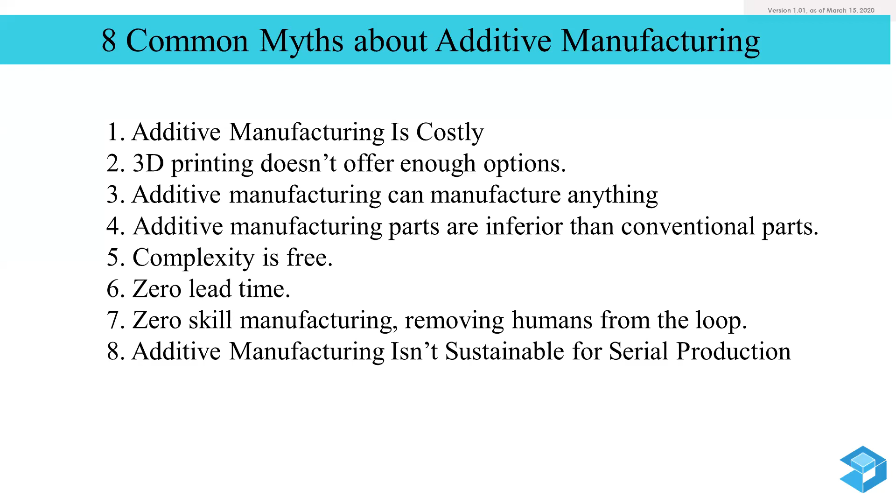We will also talk about the comparison between a conventionally produced component and an additively manufactured component, and then the complexity section: how additive manufacturing answers complexity-related questions of the design. We will talk about zero lead time, the misunderstanding that additive manufacturing can be done in zero time. Then we will discuss the skill factor, and also serial production with additive manufacturing as a technology for your product requirements. So Rahul, can you go?

So as I was mentioning in the previous slide, people think that additive manufacturing is costly. In my first presentation itself, I had shown you the similar graph of additive manufacturing having a unique value proposition. So the cost is nothing unless you create a wealth around it. The wealth around additive manufacturing is having a low volume and having unique designs, and those designs should be a bit impossible for other technologies, and your demand should be elastic enough to sustain.

So these are the criteria for how you can judge if the technology itself is costly for you or it is beneficial for you. There have been certain cases with our own operations where customers have been coming back to us because of their design, their small batch, or their elastic requirement. So it won't make any sense for them to go into other technology like die casting, injection molding, or any other production-related technology.

So additive manufacturing becomes a very good value proposition for quick turnaround, for small batches, for lean volumes kind of activity. So that's how it becomes a good proposition for your application itself.

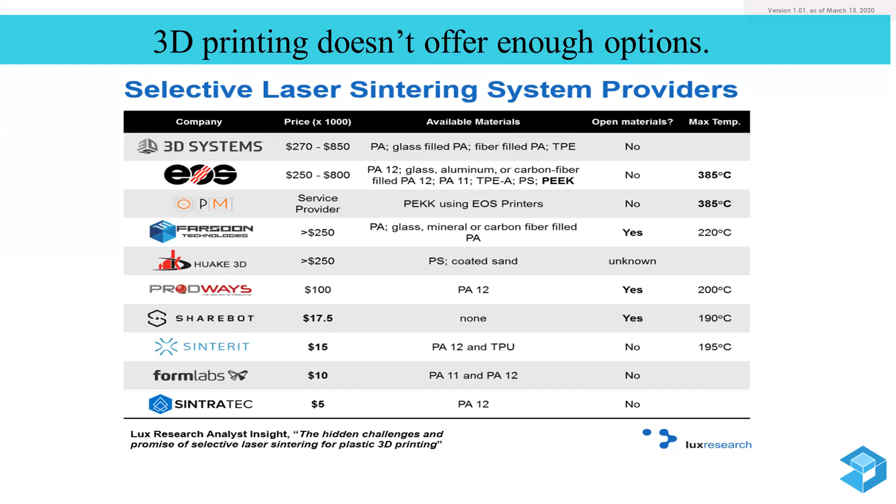Different sorts of materials, but not all sorts of materials. So this is one example. In the case of glass, yes, glass can be 3D printed, but the accuracy, precision and scale are not like the glass vials or bottles that you can produce. So setting a realistic expectation of what the technology can offer and what the limitations are is something we want to demystify. In metals and polymers, there is a lot of variety that you can print.

But when it comes to glass, we can mimic the glass using polycarbonate or any sort of acrylates or epoxy, which is clear. So we can mimic glass using 3D printers. But if you want to print glass, yes, it can be printed. However, there are limitations. The extruder that you can use for glass printing has to be at least 10 in thickness, so you cannot print very intricate shapes and tiny feature details.

The reason behind it is glass rheology. So the material properties come into the picture in these scenarios. Glass melts around 1800 degrees centigrade, so that in itself is quite a challenge. What sort of nozzle design has to go along with that? What is the flowability at a specific temperature? All these things need to be considered.

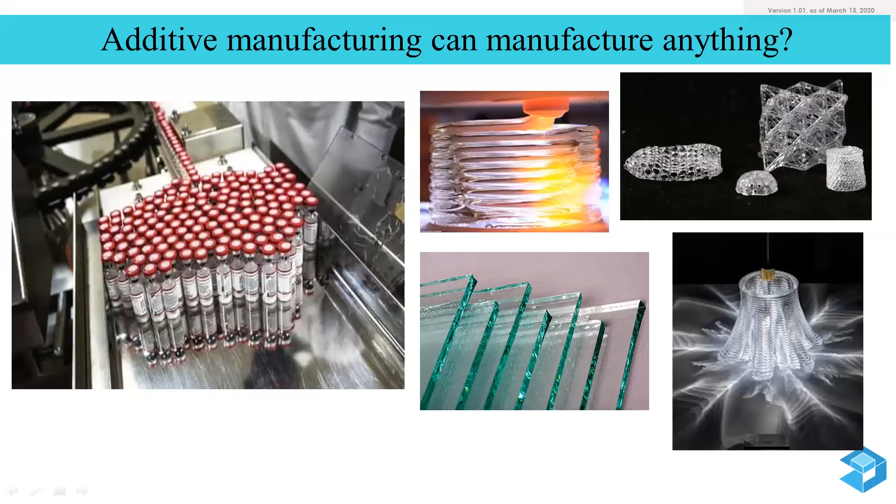So what people were generally asking in the previous two sessions also is that additive manufactured components can have lower properties compared to conventional components. But there have been certain applications where people have realized additive manufacturing is an answer for their component, and now people have started designing for additive manufacturing. So it has changed the complete structure of designing a component for manufacturing itself.

So it is a new aircraft from Boeing. So if properties was the question, additive manufacturing answers that question really well. What we generally tell our customers is that the properties of an additive manufactured component will be somewhere between investment casting and forging technology. So it will be lower than forging technology, but it will be higher than investment casting.

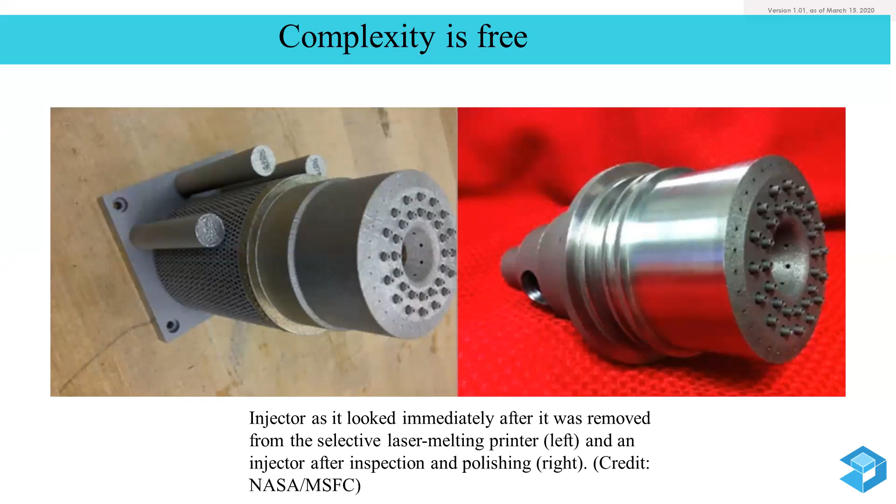So okay. Yes. So next, you can add a certain comment on it, and then I will move. So the most important part of additive manufacturing or any other technology is how well you do your project planning itself. So whenever you take a component to be manufactured, what you have to take care of is how you want it at the very end. So that kind of planning is very much required in additive manufacturing. So complexity becomes a challenge for post processing. So you have to orient the component, you have to design the component for utilizing all the activities which are related to finishing the component in its desired form itself.

So Rahul. Yeah. So next one is about lead time. Ankit, share your experience. So what people say about the technology itself is that the lead time will be very low. So people say it tends towards zero. Yes, everything tends towards zero, but it is not magic. So you have to do a lot of project planning. You have to invest time with the machine itself. You have to invest time in the design itself. So that amount of time is also the lead time incurred in the process. Yes, it is faster than any other technology, but it also depends on your production rate.

So if compared with injection molding, in injection molding the time to produce the tool is higher compared to an additively manufactured component. But in injection molding, after the tool is made, the subsequent number of shots are easier and faster to produce than additive manufacturing. But you can have those initial batches, and you can answer your elastic requirements, elastic demand of your component itself. So that's where the technology becomes very good on lead time. So it will not be zero, but it will be very less as compared to the conventional technology itself.

I will add one comment. So people paint a picture that the printing is instantaneous and you just have to upload certain design data, and at a click of a button you get the necessary outcome. And that's a wrong conception. And also on top of that, the lead time experience in comparison with additive manufacturing and conventional that Ankit was speaking about. So imagine you made a mold for making zebras. So that is a fixed automation. As a toy for kids, you made a zebra tool design, and you can only get zebras out of it. But it can be at a faster rate. You can get thousands of quantity, but you cannot get any other toy.

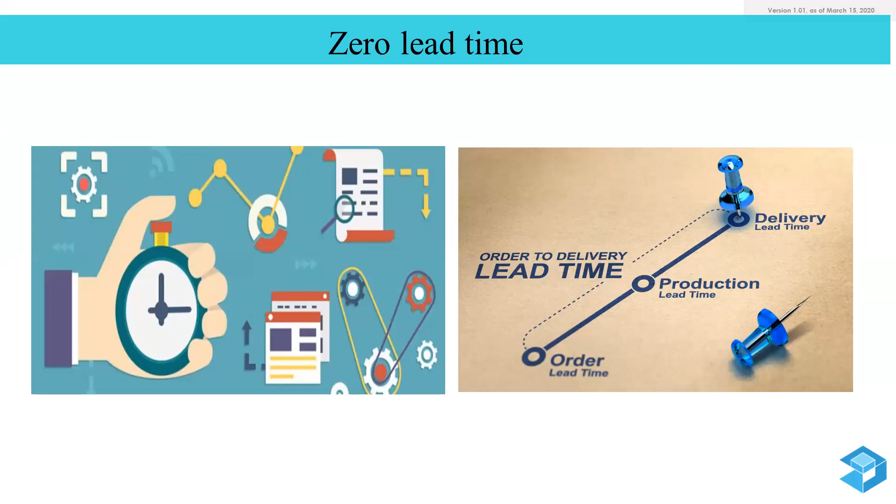So skill set requirement and the learning curve is quite steep in additive manufacturing. It has been a misconception with everyone that it is a very easy to use technology. Yes, it is easy when your designs are good and your machine codes are running very well. But to have certain complex programs, in a case like Objectify, where we tackle almost 30 odd customers daily, and these 30 odd customers have, let's say, 5 different designs, it comes out to be 150 odd parts to be produced in a single day.

So that kind of project planning is very much required. That kind of data preparation is very much required. And that kind of scheduling and forecasting of our capacity is very well required. So that's where the skill of your manufacturing understanding comes in, and that's how additive manufacturing is a technology where you have to have a very good amount of learning on the manufacturing process and the design aspect itself.

Rahul? Yeah. So that previous slide was about fixed versus flexible automation again. Whenever fixed automation is going on, you can design it once and it can be producing the same article, but there is no innovation. Innovation is stagnant. But this technology offers you continuously evolving designs, continuously challenging and pushing the envelope. So yeah, next topic, Ankit, take it.

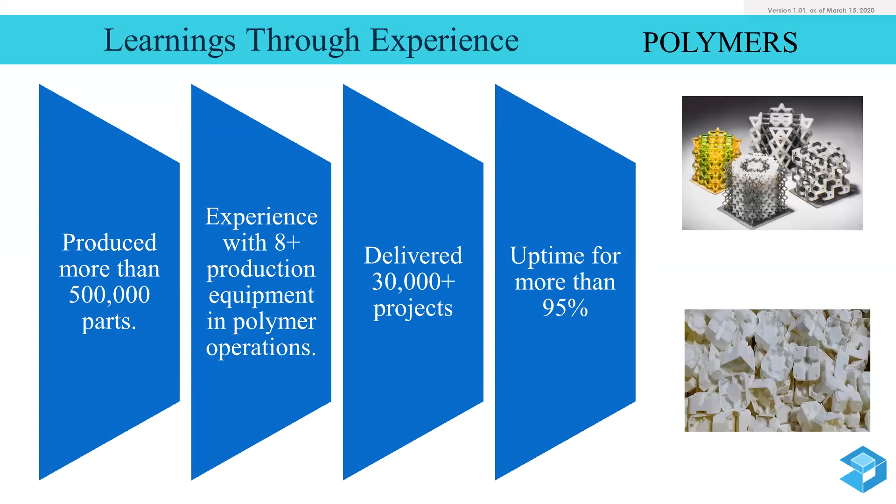We also wanted to talk to you about metal. Currently, at least on the metal side, we are the biggest additive manufacturing setup in India and South Asia. We have a good experience of more than 25,000 hours of printing in metal, and we have executed more than 2,000 unique metal projects. It might consist of several designs in one project itself also.

Our metal operations began in 2016. In 4 years, we have melted more than 8 tons of AlSi10Mg, 5 tons of maraging steel and SS316L, and 3 tons of titanium Ti6Al4V. So that is the experience on material level, and that is our experience on executing projects for our customers.

From there, we have learned a lot, and we have gone through a lot of failures and a lot of misconceptions at our end, which got cleared during the process itself. These learnings we wanted to impart with you in today's presentation. I just wanted to give you a background of Objectify's experience, which is why I wanted to discuss all the statistics, so that you will be confident that we have some backing numbers with us.

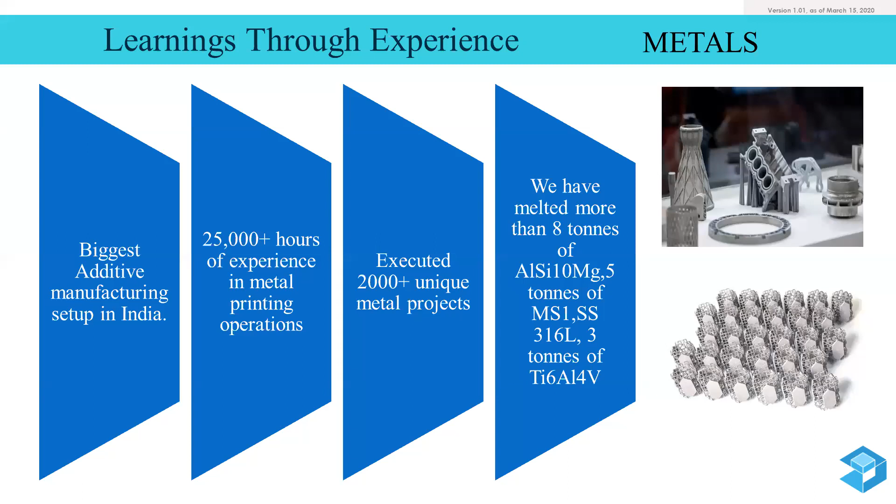So the learning process for us is similar to what you do. It is learn, unlearn, then relearn, and then reinforce the technology itself. Learning comes from the experience, unlearning is a reflexive action, or the observation of what we do, and then again we relearn, which is called thinking. Whatever we unlearn, we think about it and then reinforce those learnings in our attempt to complete the process chain itself.

We also follow a PDCA kind of cycle, which is a known planning cycle. We again and again learn in different projects, because we are not exactly making a product. We are trying to service our customers. Every customer has a unique problem statement with their unique designs. With every design we learn a lot, and that learning we wanted to impart with you. So with this similar cycle, I want you today to learn, unlearn, relearn, and reinforce the thought process itself. Right?

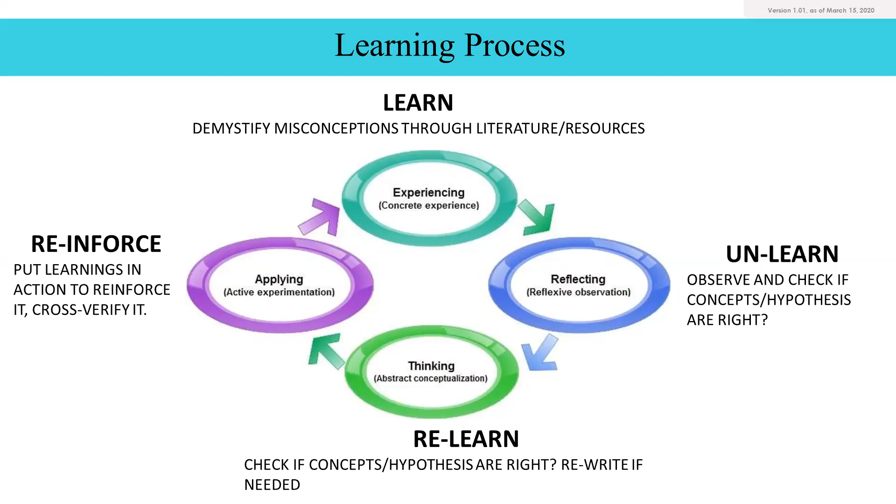We will be talking about the SLS process and the defects around the SLS process itself. As I told you, we also faced a lot of difficulties in understanding what kind of technology is required for what level of part quality. So I just wanted to discuss the SLS front.

There are 4 kinds of defects you can understand from the technology itself. One is geometric and dimensional. The second one is surface quality, which is related to the finishing of the product. The third one is the microstructure, and the fourth one, the most important one for any material, is the mechanical properties. In the geometric and dimensional defect, dimensional inaccuracy is the basic problem. So we reiterate several times on the process itself to have the best results possible.

The surface quality in SLS, as an example: orientation plays a very big role in the surface finish, and the layer thickness. So we take care accordingly. It should also not affect the monetary factors, which is the profitability and producing as many parts as possible in one single go itself.

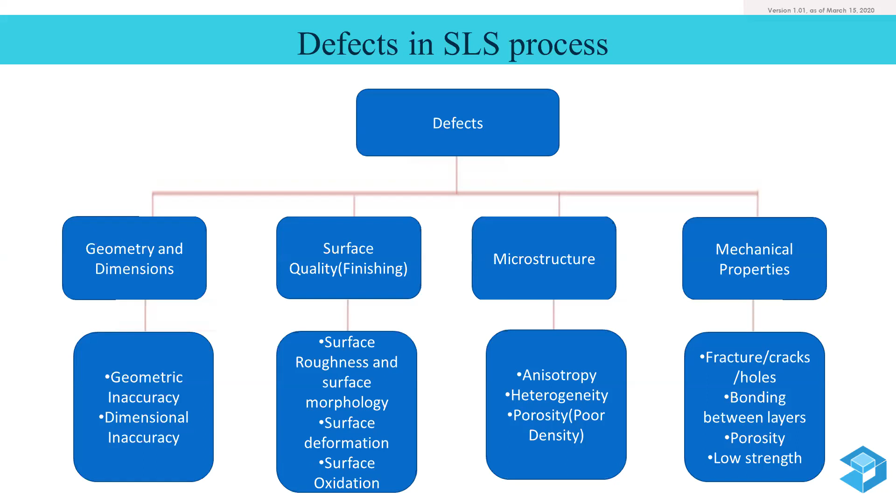Then comes the microstructure. So the microstructure of the component is very important, as you are melting and solidifying the layers. So microstructure plays a very important role, and the mechanical properties are important for your functionalities. So those are some of the defects we answer every day with our customer-related problems.

So these are some of the things where we talk about the warpages. So warpage is also one of the basic criteria. It depends on the material getting curled in itself, and creating self-buckling kind of an attribute. So here you can see what kind of examples there are for warpages in SLS technology. So you have to choose the right parameters for the right level of requirement of your product itself.

So Rahul? Yeah, so I can add some more on this page. So you can see there are 4 variants: A, B, C, D. In case of B and C, you can see because of the warpages how the geometry is deforming, and it is not giving perfectly orthogonal surfaces. In case of B, it looks like it's blown out, and in C it is shrunken, and in case of D, it has a totally warped geometry in a transverse plane.

So something of that sort affects your assembly as well as the overall aesthetics, how the product looks in terms of finish and feel. So that is something we need to tackle. These are very common challenges engineers solve. We are always living in a dilemma that we want to achieve faster delivery, but with better accuracy and a lower cost. So that's one of the dilemmas.

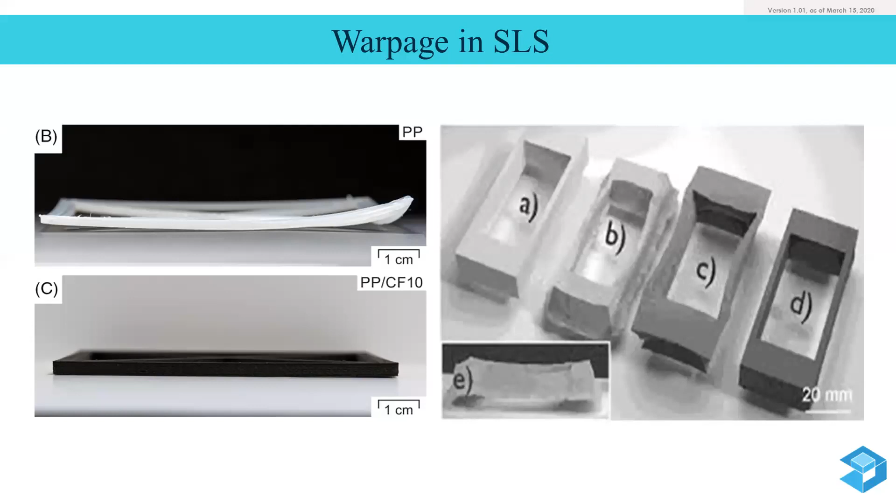Yes. So in additive manufacturing as a prototyping technology, these are a few of the things you have to take care of while producing a good component. So you can check these kinds of results after some testing samples, and you can check the temperature at which you are operating and what melting power you're using on your laser. So these are a few things you can take care of. Rahul, can you go next?

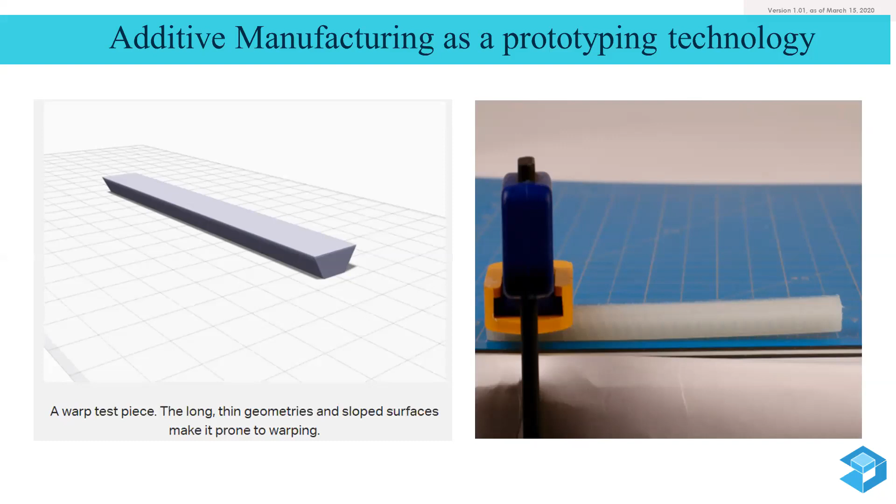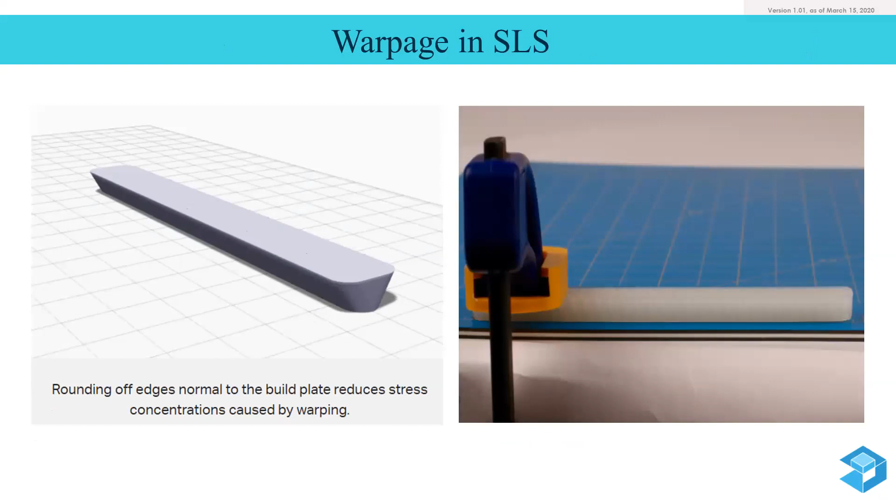Yeah, so over here we are changing this geometric shape in order to get better accuracy in terms of that very high aspect ratio, thin structure geometry. So we are changing the shape, and with those sorts of experiments, we can reduce the warpages. And these sorts of design interventions we constantly do. So the next topic is Ankit.

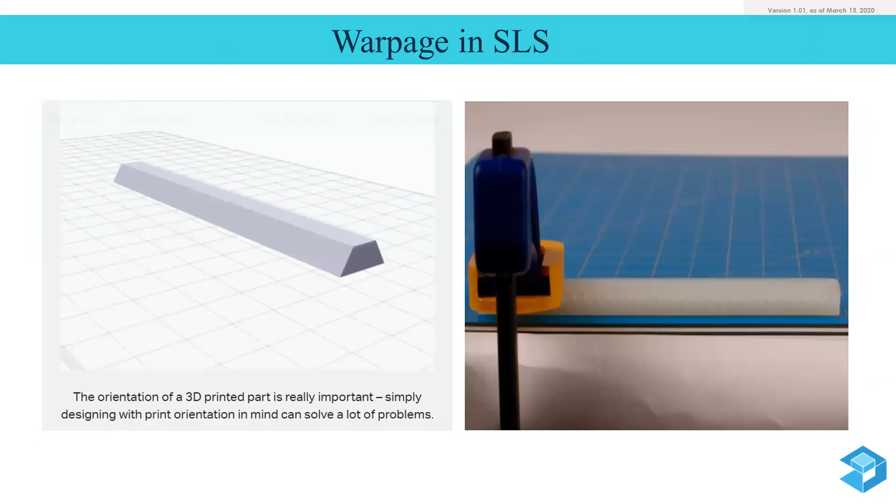So we have to decide what kind of compromise we want to make on the feature or the surface finish itself. So these are some things you need to take care of during the process itself. Rahul, can you go next? Yeah.

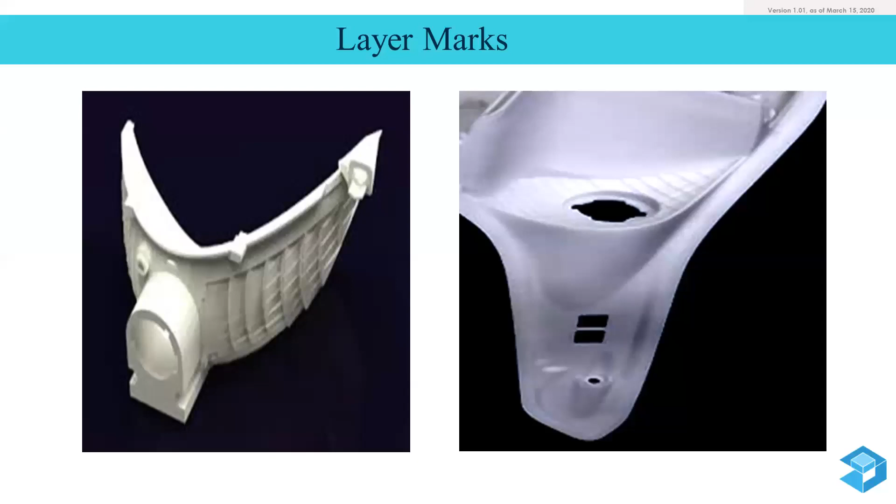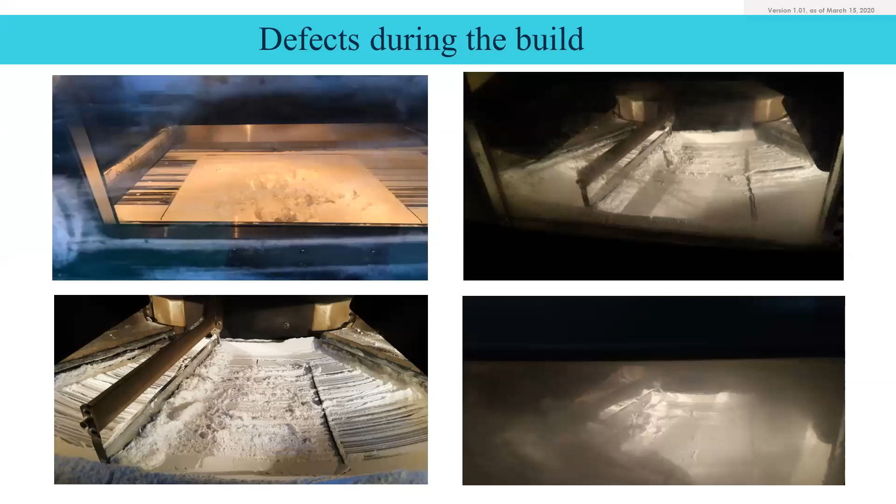But due to this, there is a lot of monetary loss. So we have to understand that these are some of the factors we have to take care of during the process itself. Rahul, can you go next again? So defects on the hole sizes is also one thing we should take care of, and we do design of experiments for this.

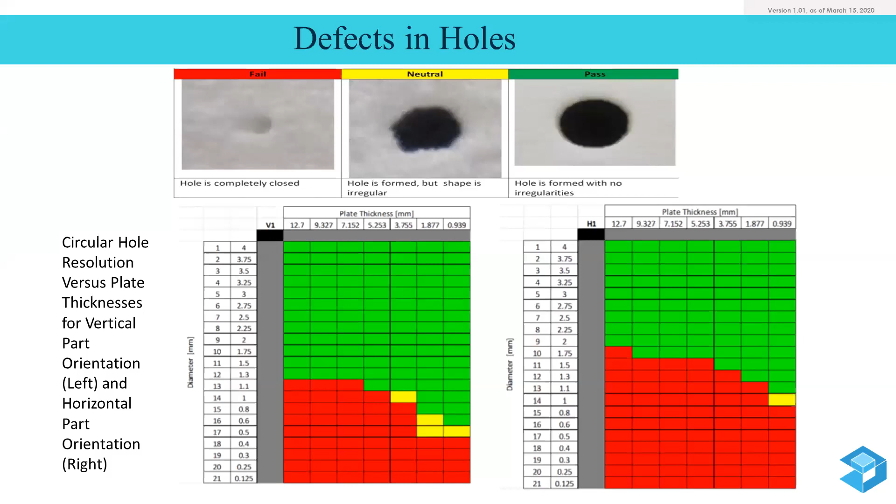As you can see on the screen itself, there are certain holes which require a certain level of resolution. So here is one small DOE we generally do to understand what kind of laser power is required, what is needed for the surface finish requirement, and how we should go ahead in answering these kinds of problems.

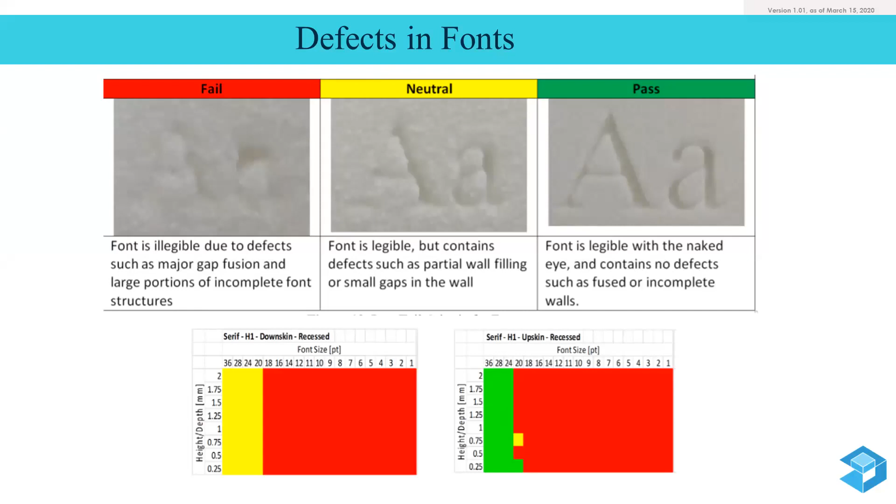So on the font, let's say you want to type your name on the component, you have to take care of these related problems. You have to keep checking the thickness and the indentation you're working on. So again, you have to do certain DOEs to gain that kind of experience and tell your customer that these are the desired inputs related to the design itself, and you have to tackle them during the processing of the build itself. Right?

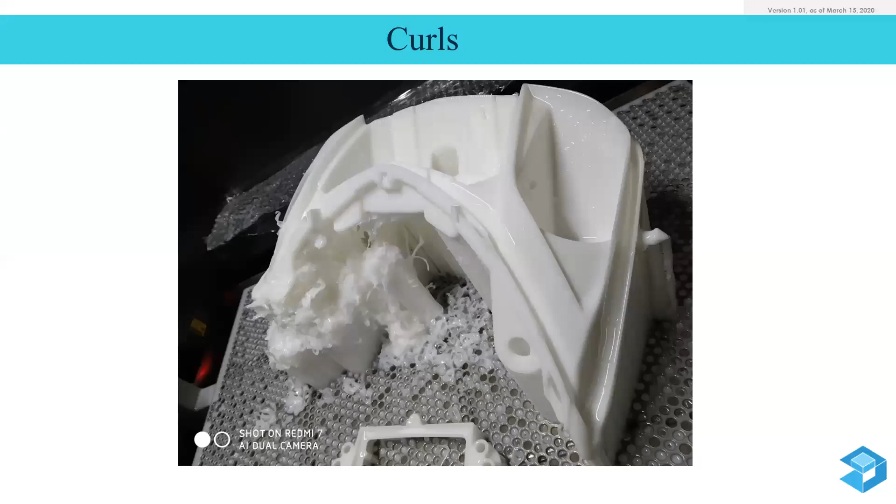So again, support is a very big challenge in stereolithography. You have to orient the component as desired, and remove as much extra support as possible, because it is a sunk cost to your product. But doing that, you should not cut material so much that the component fails during the process. So you have to design and orient accordingly, so that you require less support but enough support to actually make the component.

Rahul? Yeah. Next poll. Yes.

So we are designing these polls to engage you and understand where you stand in terms of utilization of technology, what information we have shared so far, and how our next engagement should be, so that we prepare our programs for better reception with the audience, and there is an action plan to follow. It's not something you consume as information and forget; that's the failure we would consider. The learning has to be reinforced when you put it in action. That's the plan, do, check, act model we mentioned. If act is absent, what's the point of plan, do, and check? That's why we are very action oriented, and in the learnings we shared so far, you can see there have been failures. Failure exists where there are actions.

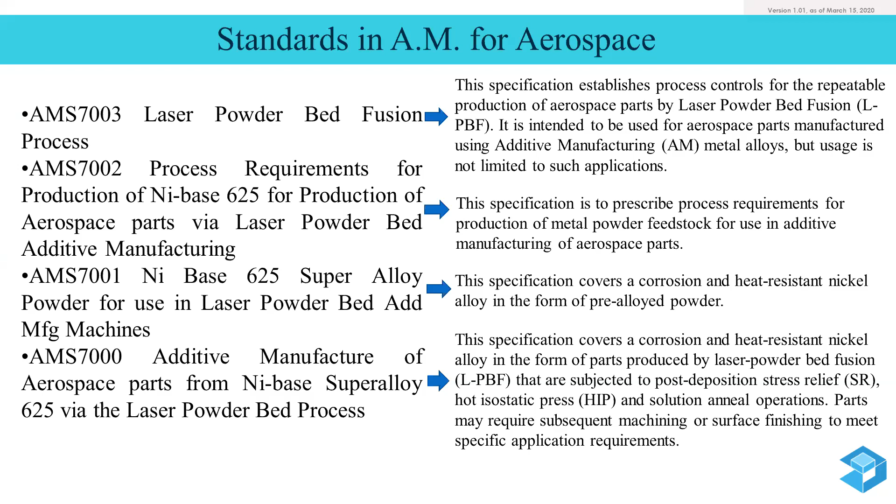Only focusing on the printing process is foolish, I think, because what you are going to print, you need to be smart about that as well. So in order to handle the complexity, it's not the process that you usually follow in case of injection molding or blow molding or casting, die casting, where you just qualify the tool and process just once, and it is repetitively manufacturing the similar sort of component.

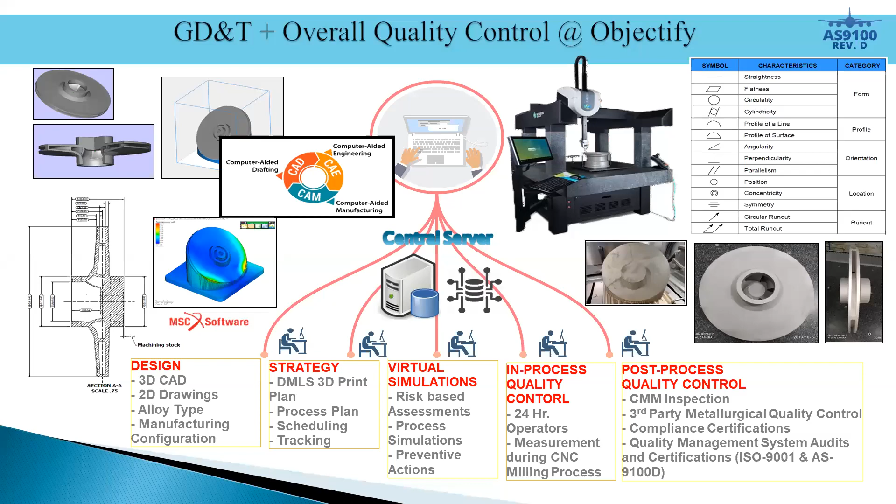So first beginning with the process management, but that's not the end of it. We have to see, in process, how we can control the quality and get the best outcome. So in terms of machine maintenance as well, which becomes very crucial. So we continuously keep on doing this type of qualification at certain frequency, in a sense calibrating the machine performance. So we build this type of test builds as a design of experiment and do the calibration, find out the beam offset and do the correction.

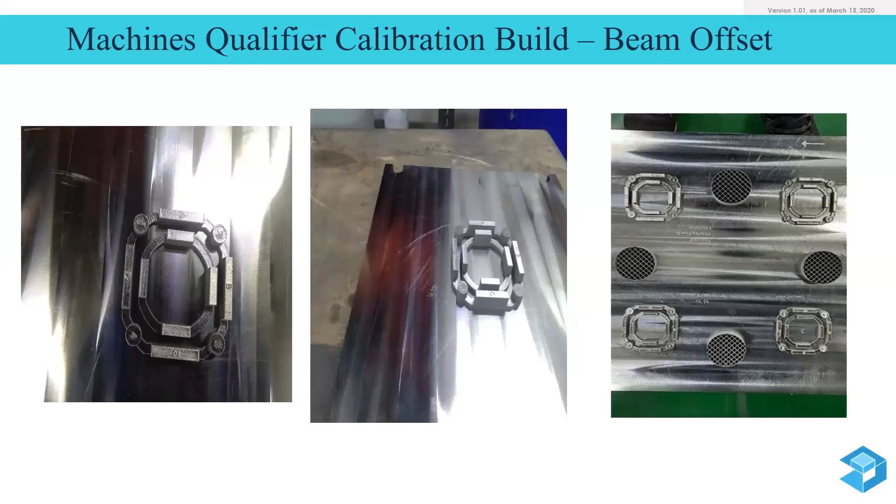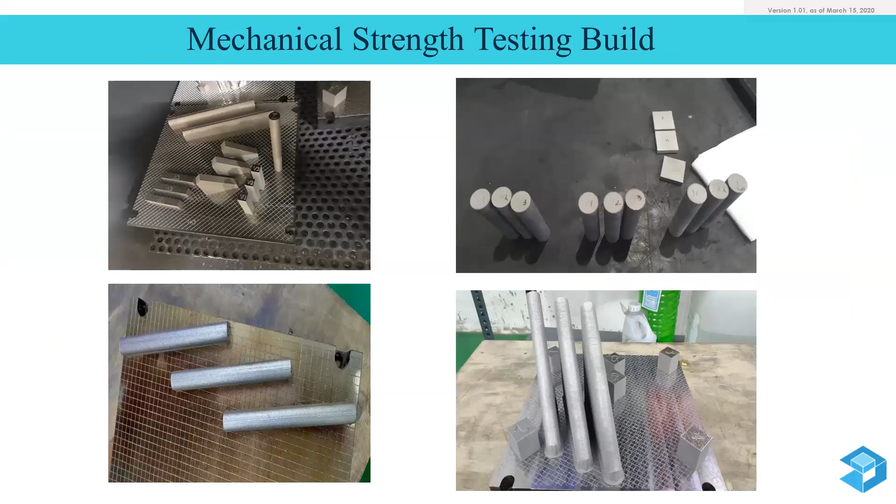And Ankit, in the first webinar, was sharing the example of ISRO, how they are level-headed in terms of expectations and very thorough in terms of defining the quality parameters and all. So in terms of that, robust input gives robust quality and output. Garbage in, garbage out is something CAE engineers use every day, I think. So this is an example we are showing.

So we print certain objects which we process in order to find out how much is the residual stress, and because of that the bending or warpage that is coming into objects, and we measure that using CMM and that data gets transferred into models. We feed those models. Once those models are learned enough, then they can predict much better, and we can believe those results almost blindly.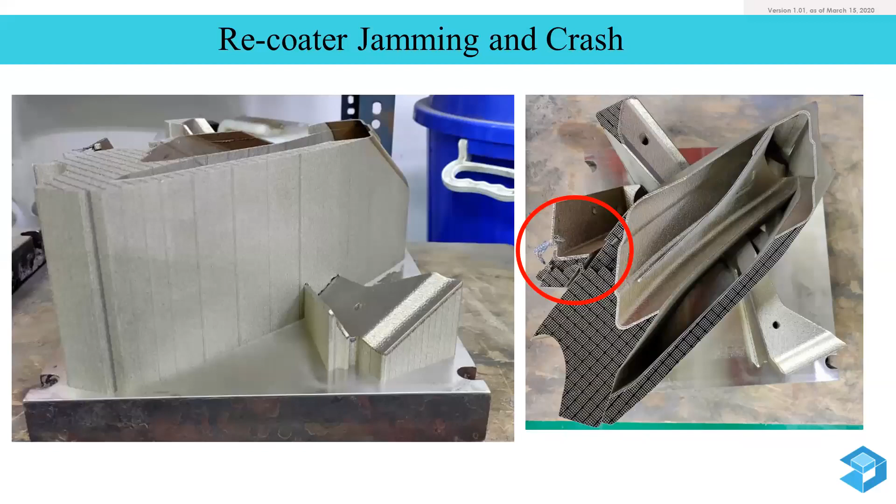So over here you can see printing a thin shell-like structure, almost like a sheet metal component. There was a failure because the coater had jammed, and because of the thermal deviation in the geometry. Similarly, we experiment. So we wanted to print around 3 sectors in order to make a complete stator of a compressor. That is made in titanium.

So we wanted to understand the best strategy to print the entire sector of 120 degrees, because of the build envelope we can only print 120 degrees, and then it has to be welded and joined to make the complete 360-degree structure. But if we fail on that sort of a 5 kg component, which is 120 degrees in arc, that will be a very severe failure. So we wanted to fail early, fail small, fail cheap.

So over here you can see, on only a 10-degree sector we strategized different support structure strategies, and one of them failed, another one succeeded. So that's the way we proactively plan how far we can push the technology, which variations we can put in practice, and learn from it.

So another example, again a sheet metal type of component. When the coater jams and hits, if the geometry is too thin, then it can have a certain deviation, and there will be a subsequent offset because the layer will not be depositing at the correct location. So that is one kind of failure we learned. If we are printing very thin sheet kind of geometry, this is something we have to watch out for, and we have to have a certain reinforcement plan.

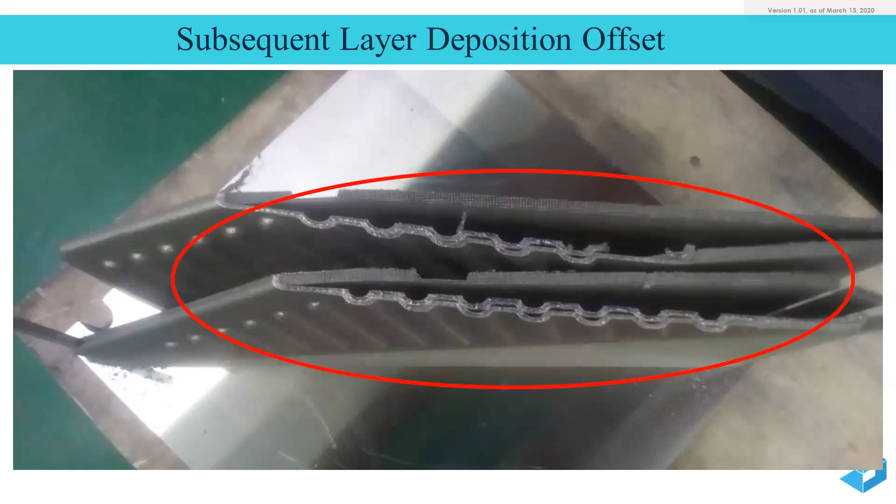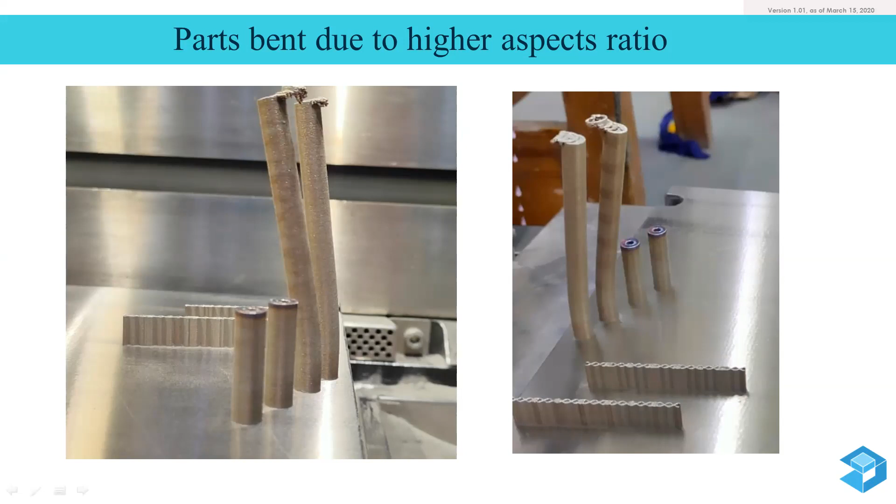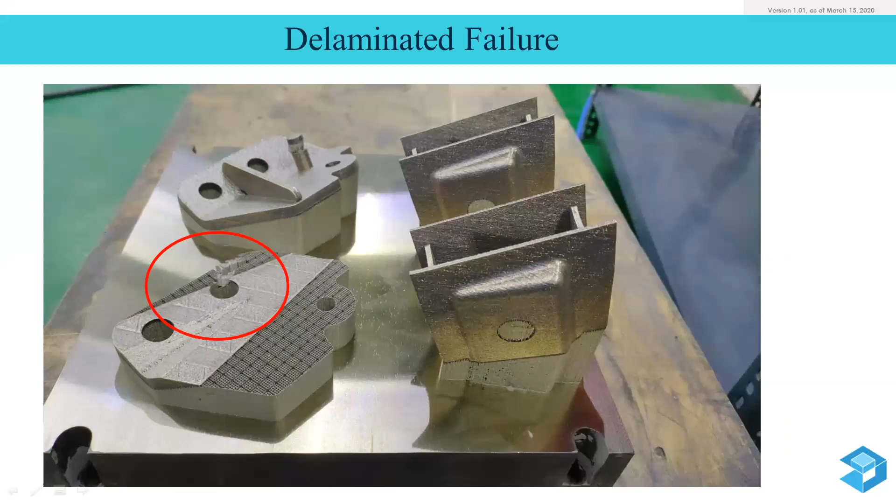So over here, 3 components were printed successfully. One of them got that sort of failure. So you can see these types of failures are common. Even though we are pre-planning, we need to do simulations, we need to do qualifications, but still there are certain surprises. So we learn every day and accommodate, and the way that we do it, I will show it to you. So I will first go through all the types of defects and failures that likely arise.

So this is a crack initiation, you can see. Since bigger, chunkier geometry, once it receives laser exposure, has a higher tendency because of the thermal conductivity, the heat capacity inside that big, thick cross-section geometry. It can retain heat longer, and the thinner structure can get cooler faster. So you know that phenomenon. The surface area is essential.

That's why fins are added on cylinder heads of engines, or fins are added on top of our gadgets like PC chips, the semiconductor microprocessor type of chips. They also get heat sinks, right? So those are with increased surface area. So in the case of support structure, that is very mesh-like geometry. It has more surface area. It dissipates heat much faster.

But the thicker, bulkier sections don't release the heat very rapidly, and then that differential in terms of temperature causes delamination and crack initiation. So that is very common in metal 3D printing, and how to define a robust heat dissipation strategy with the support structure becomes a key challenge as well.

So all this type of learning, as I described, how we record it. So we need to have certain failure records, otherwise it gets missed and it's a lost opportunity for learning. We can blindly replan, and it will be just a fluke that one day it printed successfully, another day it did not. It is a matter of chance, and it is almost like gambling, right? So with that sort of approach, the failure rate can be tremendous, and you will go bankrupt very soon. So we don't play gambling, of course. We are engineers. We need to make wise choices, weigh the options very wisely and solve the dilemmas.

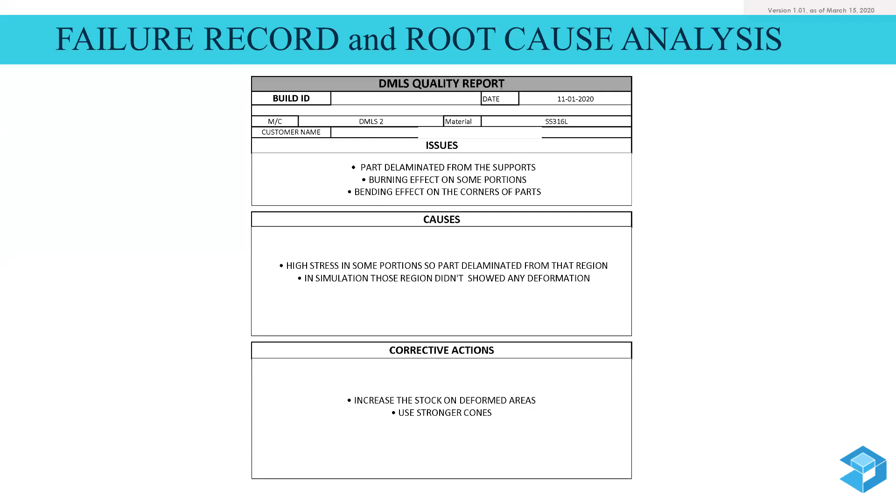So over here, you can see the issues are recorded, the failure modes are recorded, then what can be the cause for that failure mode is recorded, and how we can do the corrective action is proposed. And these types of approaches bring in interventions at the early design phases or process planning phases, where we can implement certain corrective actions or preventive actions. So learning can be in-house and outside as well. So we are constantly looking at how certain things are getting manufactured and what we can learn from it.

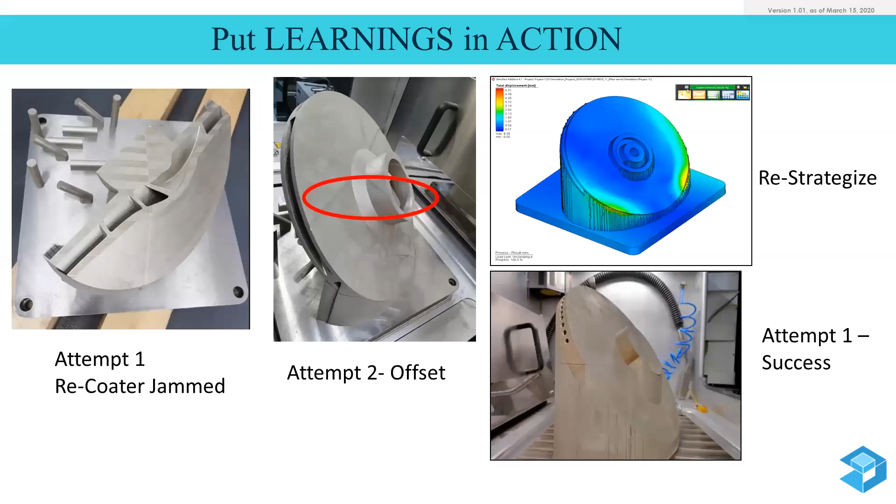So the two images on the left side, you see an attempt by one of the fabricators, and they were facing recoater jamming issues and offset issues. Even though the recoater jamming collapsed the first attempt, they went ahead with the same plan, and it again jammed. But after the jam, the subsequent layer deposition was offset. So that was the second attempt, again failed. So we re-strategized uniquely. We employed our computer power and failed virtually, and we were successful in the first attempt. So that's the beauty of learning from failure and how you can gain advantage using the power of digital skills and thorough understanding of the process.

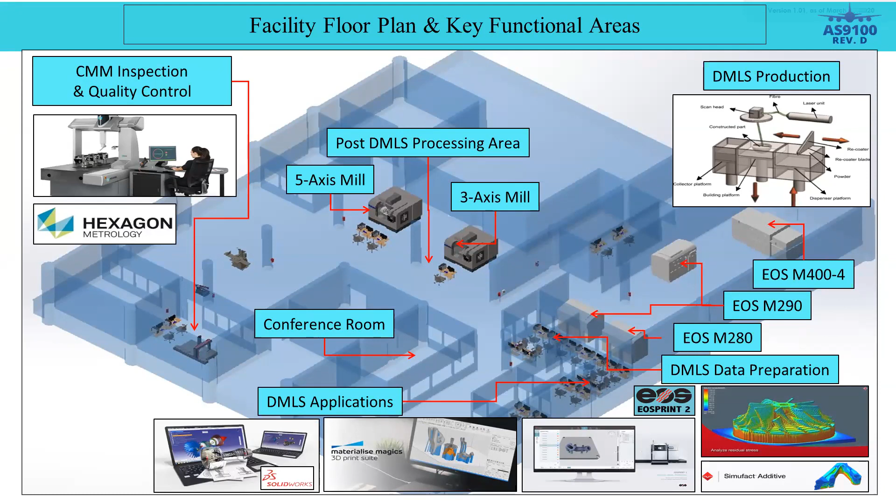So we do the layout planning like this. So you can see where our areas are, where value-added work is going on. Supportive areas as well. So people need to be safe, secured, certain safe practices, as well as the power outages are common as well. So UPS and utilities, all that sort of.

And once these kind of infrastructure and support is in place, then people are motivated to deliver better quality products, as well as they will intervene and be motivated to resolve certain issues and problems. So that's the end of our presentation. We will go ahead for discussion.

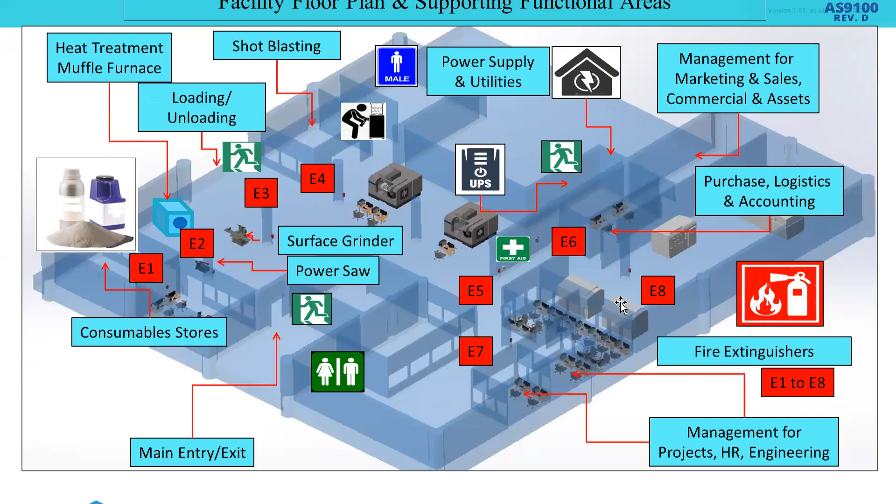So meanwhile, I will show our plant layout in much more detailed manner. So how our plant layout looks like, and I think most of you will be curious that we want to see the plant facility, but we are locked down at home. So we came up with the idea that why don't we give you a virtual plant tour.

So Ankit, you can keep engaged. I will open up. Yes, meanwhile. No, you can just show them around. Yeah. And I'll be answering their questions also. So you open. Okay. So can you see my screen? Hello, Ankit. Can you see?

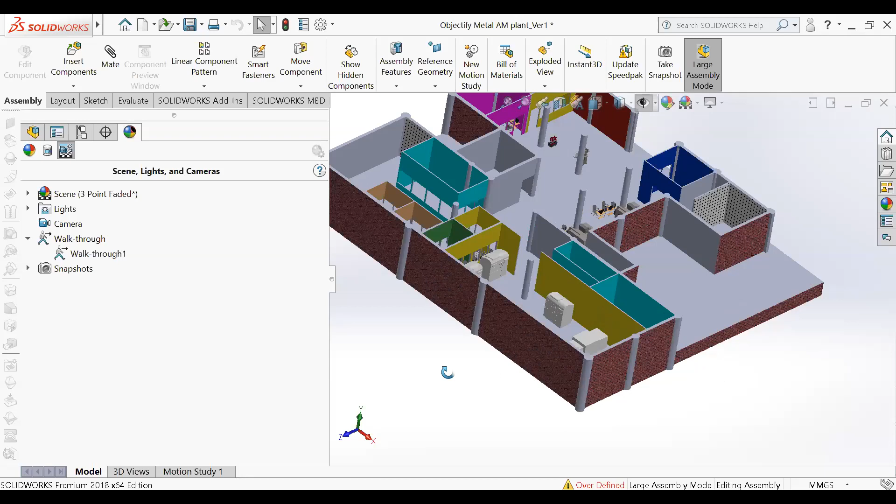Yes. So as I shared with the image over here, I'm operating using a 3D model and showing you the area. So we have a production area for 3D printing in this yellow zone, and the raw powder is over here. Then all the design planning is in this green area, and production planning, process planning is in this yellow area. Post processing happens in this open floor, shop floor, where we have CNC machines, and the loading unloading bay is over here. So that's how our layout looks like.

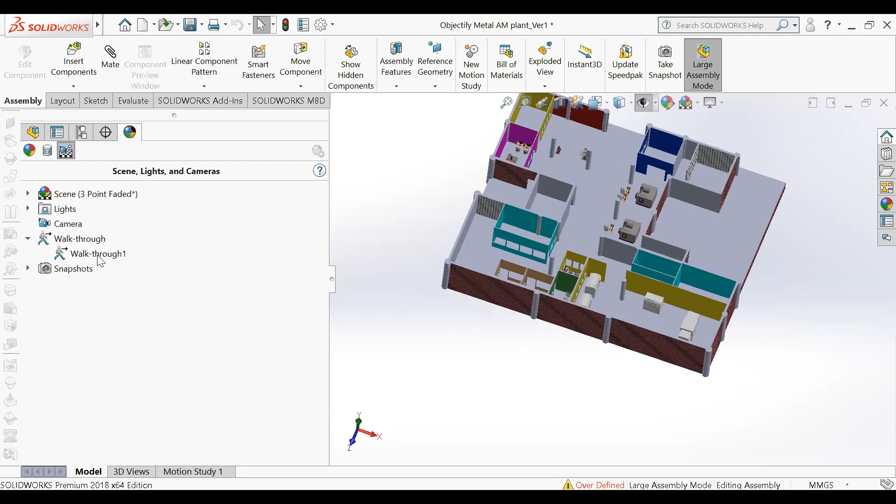So let's walk through the layout. So I will show you a walkthrough. Okay, so we are at the entrance. Just a moment, I will go to the entrance. Yeah, so we are at the entrance. So first, as soon as you enter our facility, you'll see the quality room.

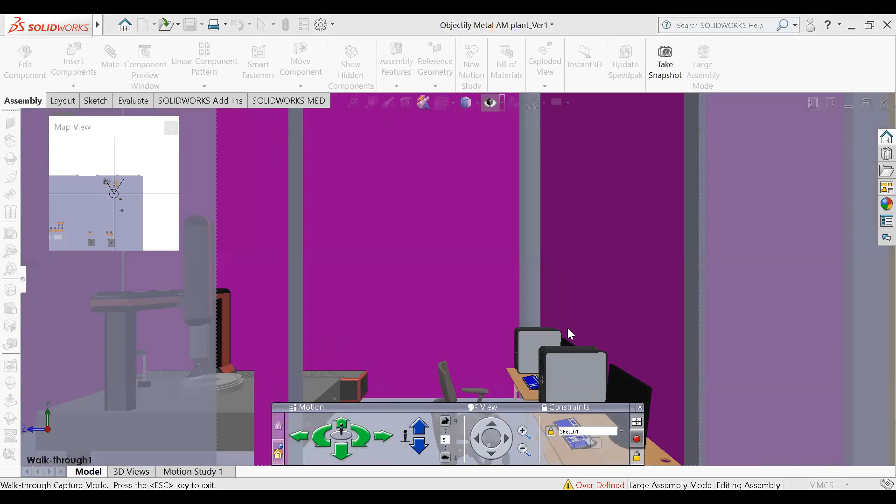So in the quality room, we have records that I was mentioning, the learning and experiences, as well as outgoing parts that are to be dispatched. We do the inspections over here using a CMM machine. So we have a couple of engineers' workstations and a CMM machine, and our material library and overall quality framework, all the records we manage in this room.

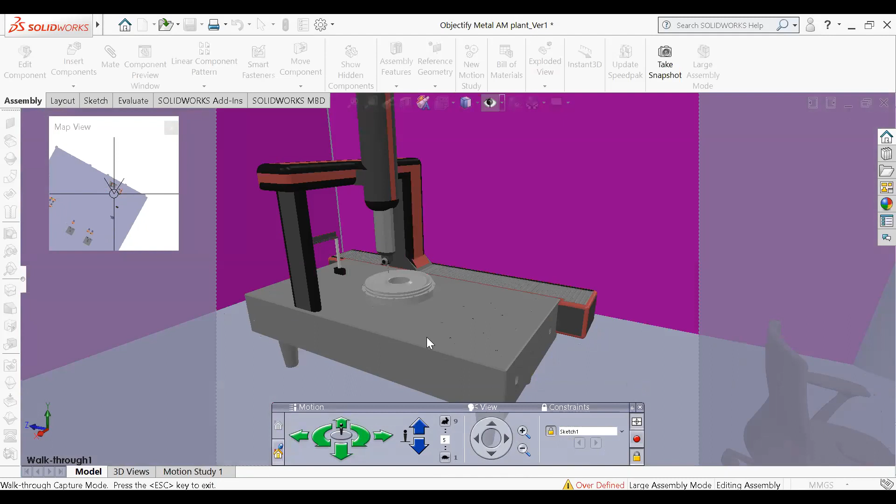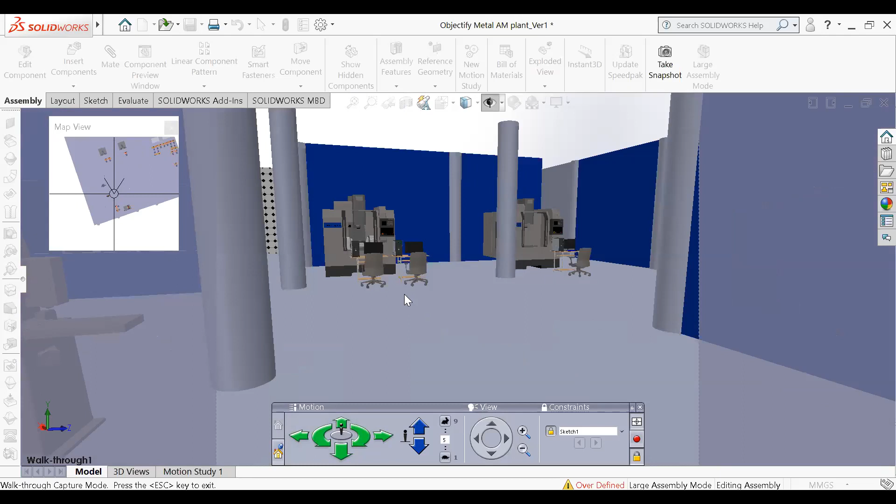So I'm showing the process chain in a reverse fashion. So before coming to the quality inspection, the post processing has happened on the component. So the post processing happens on the shop floor where last finishing touches like CNC milling and surface grinding, or if certain parts need to be detached using the power saw, all that happens over here. So let's walk towards the CNC machining capability.

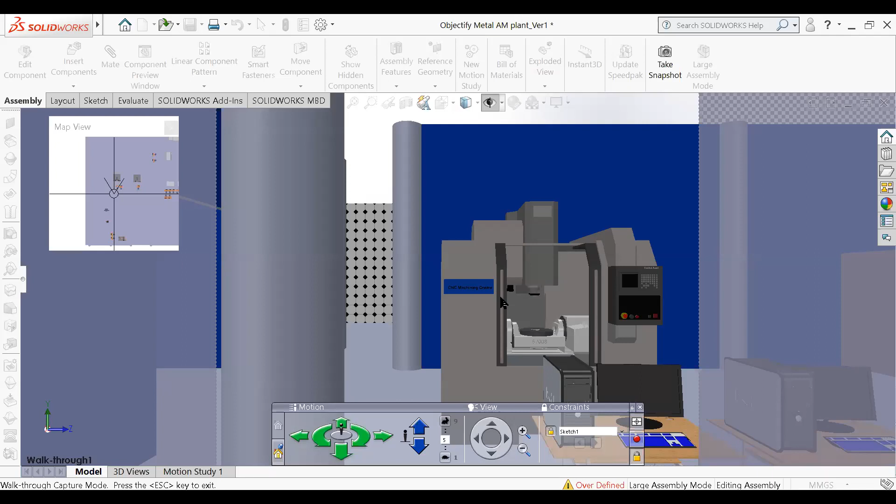So we have two CNC machines in our metal facility in Noida. So this plant is the only Noida metal facility, which is the recent one. So we moved into this facility last year in March, and it's almost a year now that we are operating in this facility. So we have two CNC machines in Noida, one CNC machine in polymer operation. So the polymer is not that advanced machine, but in case of metal, we need to handle certain complexity.

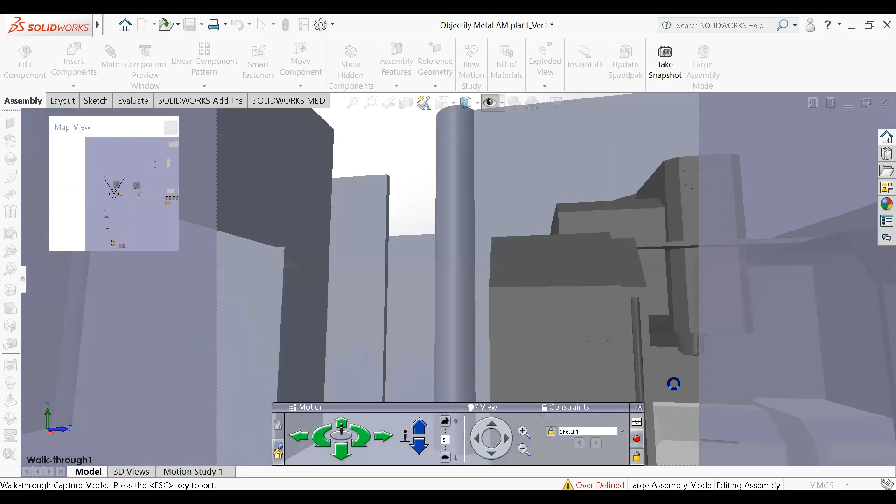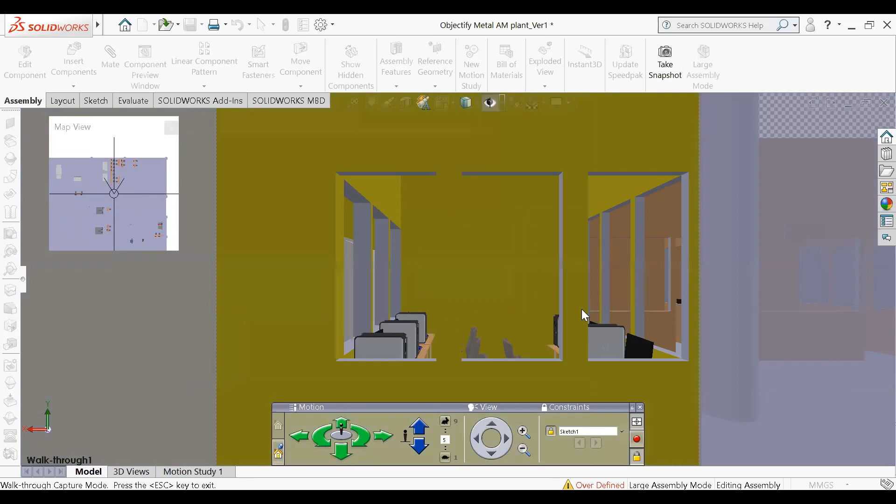And over here, you can see the best and latest one is a 5-axis machine with these rotary tables by Mazak. And we have another 3-axis CNC milling center. So both these machines do the post processing. So let's walk over to the 3D printing production room. So I'm walking towards the 3D printing production room.

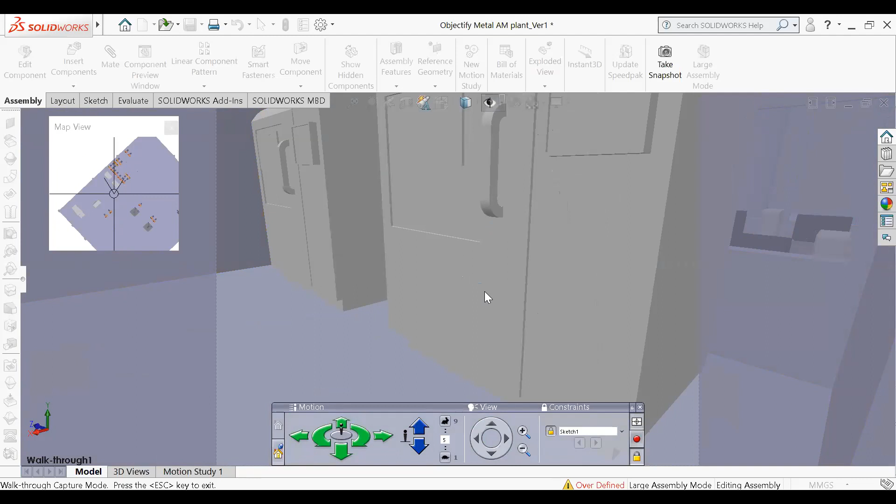So in the 3D printing production room, we have two machines on this right, which are by EOS. So DMLS technology we had been speaking about, that's the powder bed fusion. So these two machines are M290. M290 machines have a bed size of 250 by 250, and the depth that you can go is up to 300. So that's the capability of these two machines.

Then we have one machine each of M280. M280 is a precursor of M290, so it has a similar sort of capability and some degree of flexibility as well.

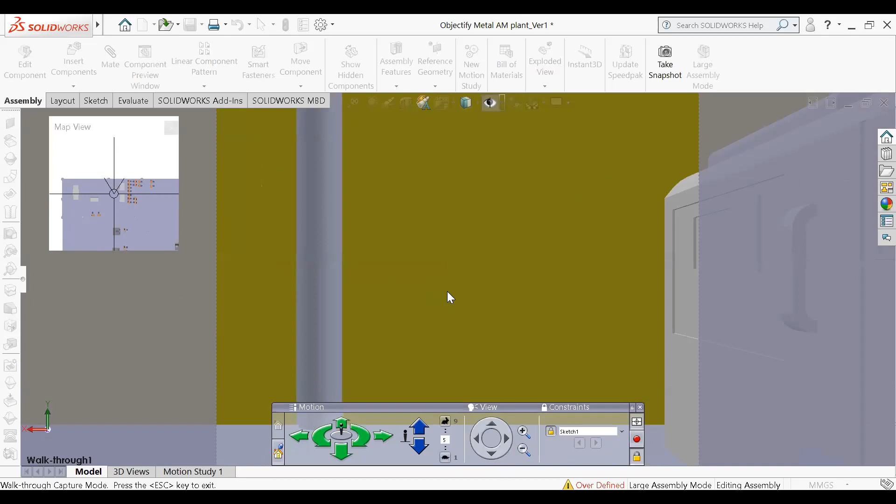So it has a build envelope of 250 by 250. So I'm showing you the M400 machine. This is the latest and best that industry can offer at the moment. So this machine is having 4 lasers that are exposing simultaneously an area of 400 by 400 mm, and the depth it can print up to 400 mm.

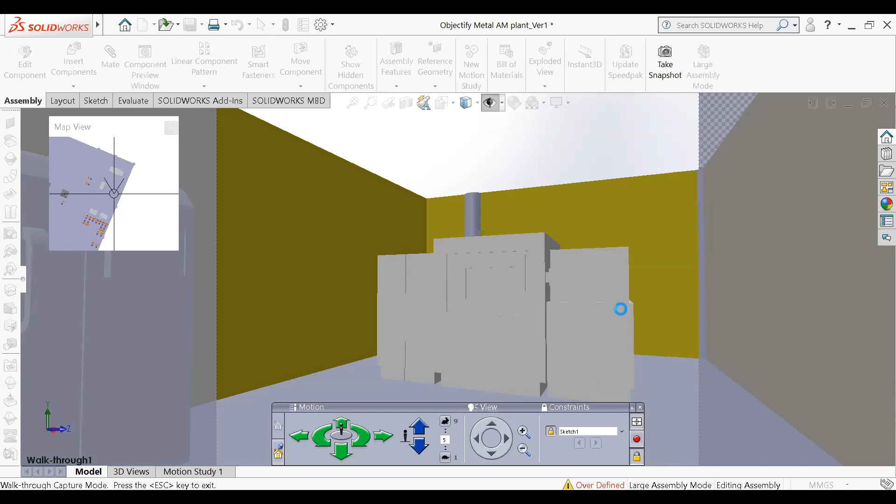So you can see the build envelope: any object that you can accommodate into a box size of 400 by 400 by 400 can be printed on this machine, and it is printing with 4 lasers simultaneously. So it is one of the fastest machines that you can imagine. So that's our metal 3D printing setup. So this is an M280 as I mentioned.

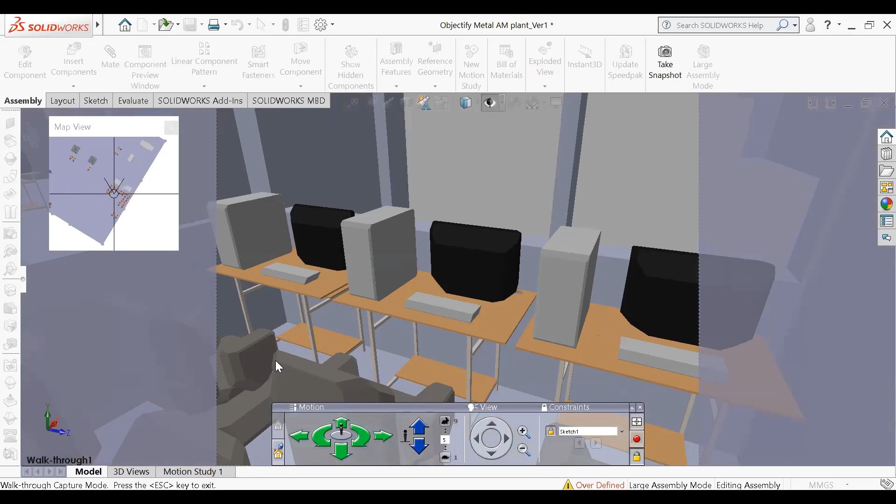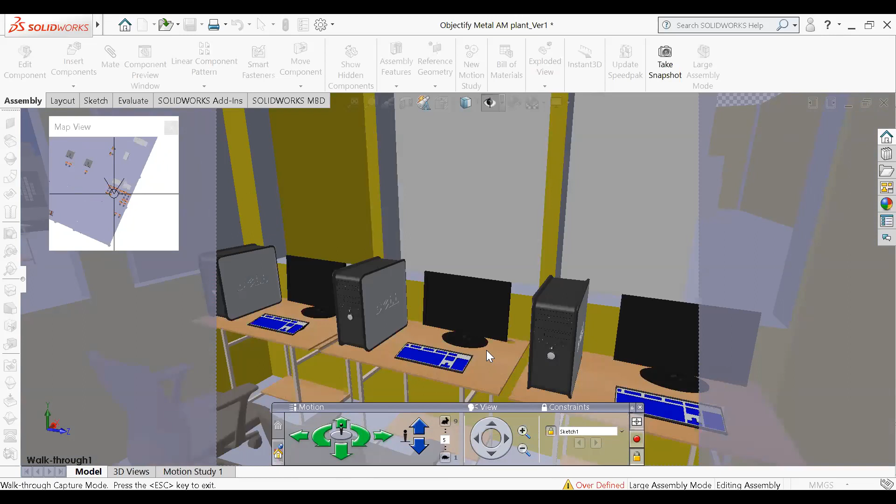So let's walk out of this room, and I will show you our software capability areas where our engineers, our real brain power sits. We have overall 5 to 6 workstations in this room. So that's where the production planning happens. So we have planning softwares like Materialise Netfabb, that's for STL file editing and process planning and support structure, geometry decision. And then we have process planning softwares as well as simulation software like Simufact, and all that is in this room. Let's move on to the last room.

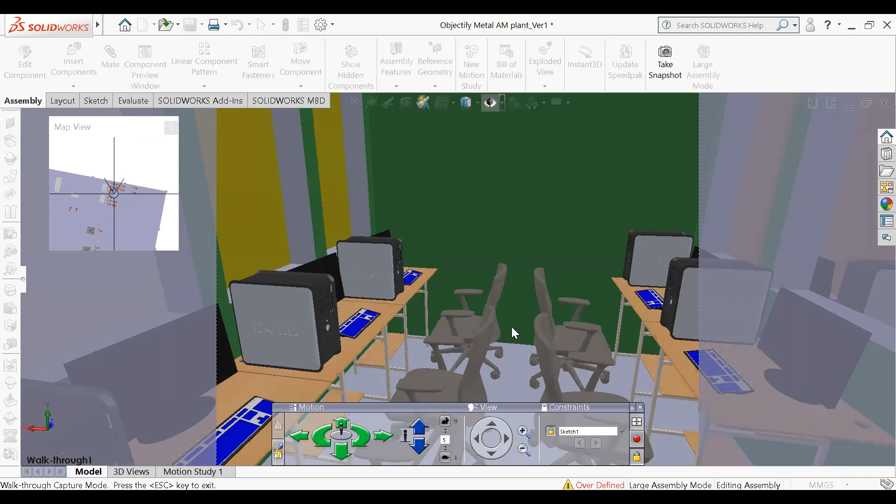That's our brain power in design. So that's how we are going up and up the value chain. So that's just the physical aspect of printing, where it happens, but the majority of time and innovation and discussions are happening in these two rooms, where our engineers are sitting and thinking about solving your problem. So over here you can see we have overall 6 workstations again in the application team.

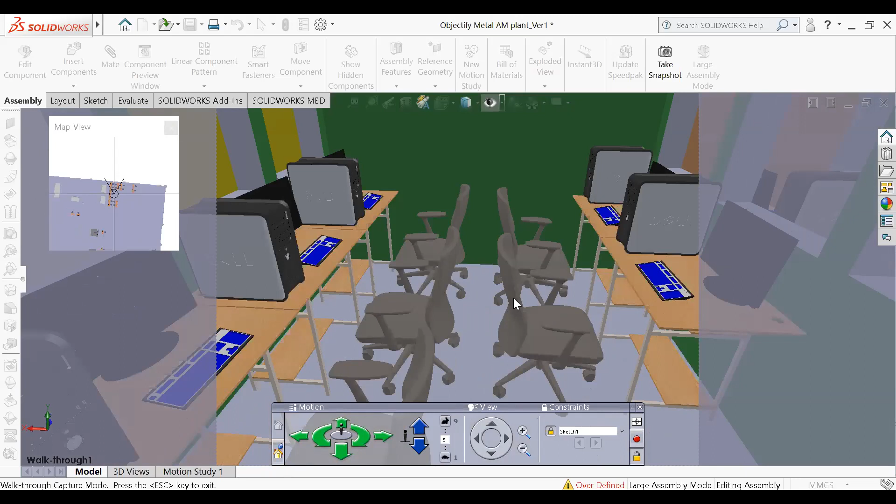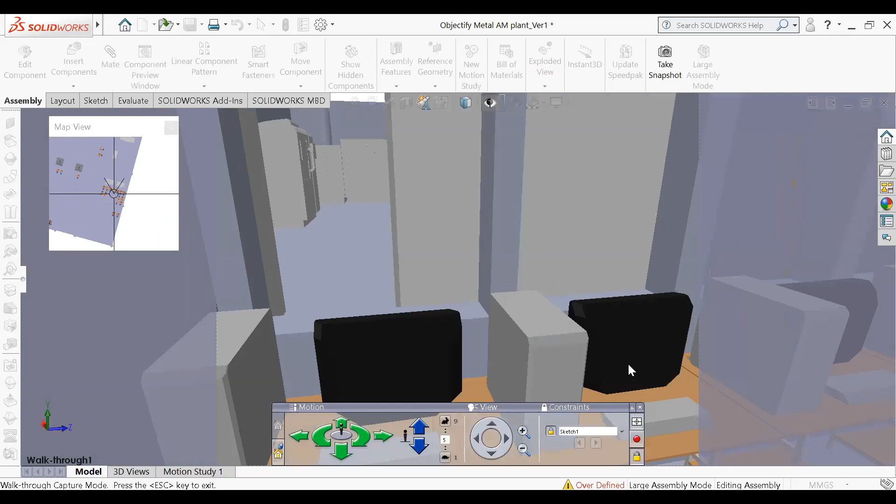We have engineers with experience in molding, manufacturing from the auto sector, medical, sheet metal working, manufacturing using injection molding, die casting. So all that sort of engineering expertise and how to consult our customers on the design front. That's where exploiting the power of additive manufacturing comes into play. So our engineers have first-hand exposure. They can just peek over here and take a look at our machines, what is going on, right? So they can advise you on the designs very robustly, and they compute the cost, lead time, and do the due diligence of recommending you.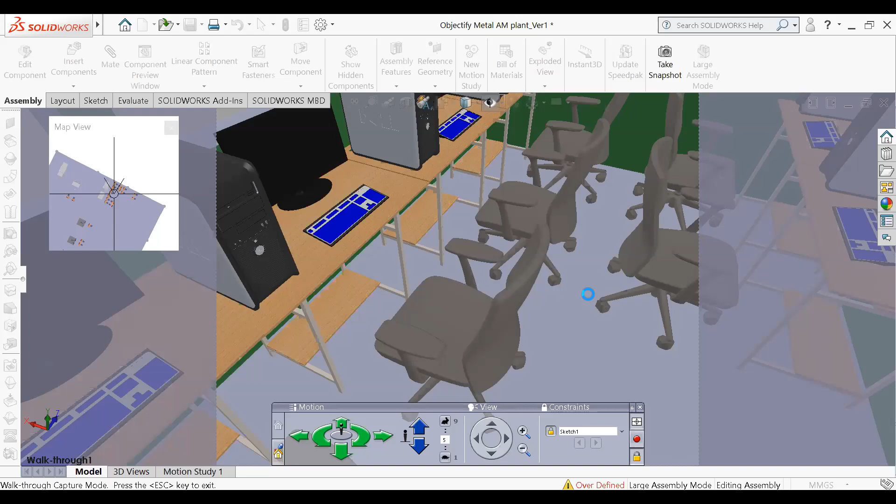So sometimes a certain customer comes for a very simple geometry. If a conventional technique is a much better option, we say no as well. So we are not always in a salesman kind of mode. So we advise correctly, wisely, so that our customer relationship is very key, and satisfaction for the customer is very important. So that's how our overall value equation is. Our layout is our flow of object.

So the poll results are ready. Would you like for me to display them? Yes. I will wrap up.

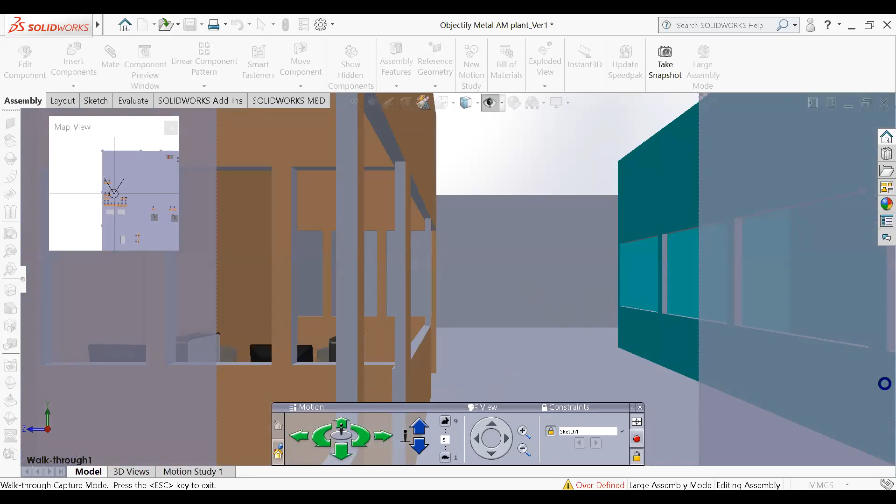So that's how our plant layout looks, and our management team constantly keeps on looking at how we can better ourselves, keep on adding value to the end customer, as well as honing our organization to be better, sharper, faster, just like the Olympic spirit. So better, faster, stronger, with teamwork and with endurance. It doesn't happen in one day. It took over a year, and in order to show this walkthrough for you, I spent some amount of time to design this virtual layout as well. So you can see we put the efforts behind it very passionately.

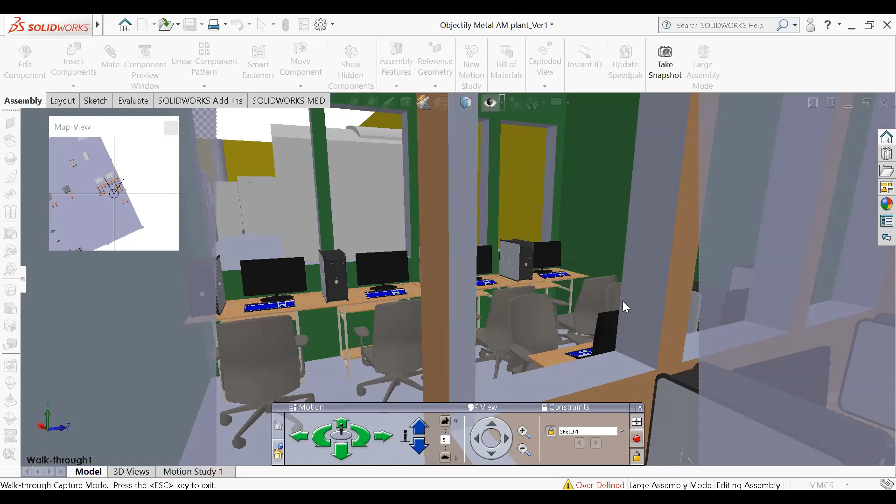So now you can share the poll result, Sankha. Yes, you can see the poll results, Rahul, sir. Yes, I can. So everyone can see. You can give your verdicts.

So with the first poll, we wanted to understand what is your proficiency with the technology itself. Here, the major amount of the audience has been at the beginner stage, with some experience in designing and manufacturing. That is really good, because that becomes the building blocks for your journey through additive. And most of you have been in the beginner to advanced to expert level. So that is a great understanding that people have certain experience with the technology itself.

And we see through our second poll that there's a lot of excitement on the metal side, which is a very good thing for a company like Objectify. But on a personal level, I just wanted to check with our audience: globally, everything is moving from metal to polymer, but in additive, people are getting more and more interested in metal than polymer.

So it is a different kind of a shift what we are also seeing with our customers. They are talking more on the metal requirements than on the polymer, but polymer also is offering a high level of solutions for the customer for the small batch, changing from injection molding to a different technology of additive, playing around with the design also. So polymer is also as important as metal, but I can totally understand right now this is the trend what we are also seeing in the technology frame itself, that people are moving more towards the metal technology.

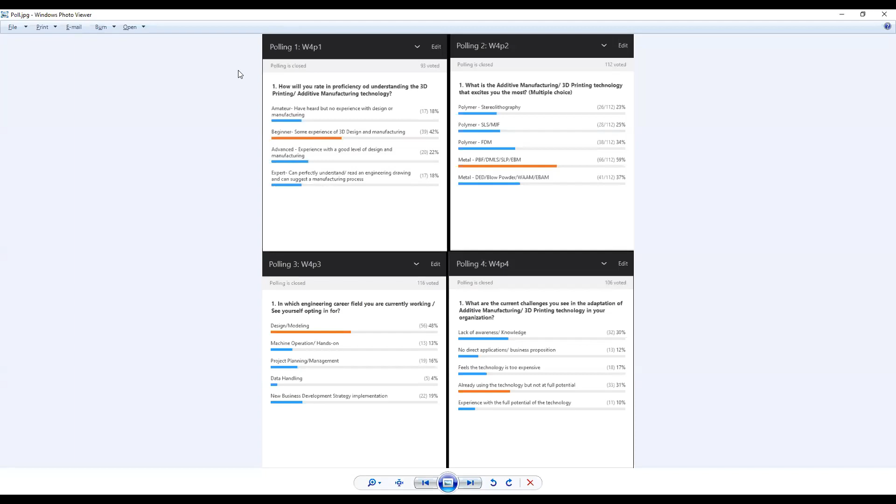So I wanted to take some questions from a few of the users. So one gentleman asked regarding what is the quality of the surface finish, and how we are able to cater to lots of bends and minor holes in the component itself. So what we generally do is try to work on the surface finish. So again, cost, quality, time is the most important thing when we are orienting any of the components. So the quality shouldn't be compromised in producing the component itself. The time to make the component is also very important. So if needed, it can be taken in a different secondary process. So it is a good question that we should be able to answer.

One gentleman also asked about the software for designing for additive manufacturing. Right now, most of the major PLM software companies have come out with their solutions for additive manufacturing, but the biggest challenge is in the conversion of the data. Most of the printers are much more comfortable taking files in the STL format, but converting from one environment to another environment, you lose a lot of data. So that is one of the challenges. So you should be able to utilize the software which is streamlined to your printer. That is a very idealistic statement, but that is the only way to go forward with the implementation itself.

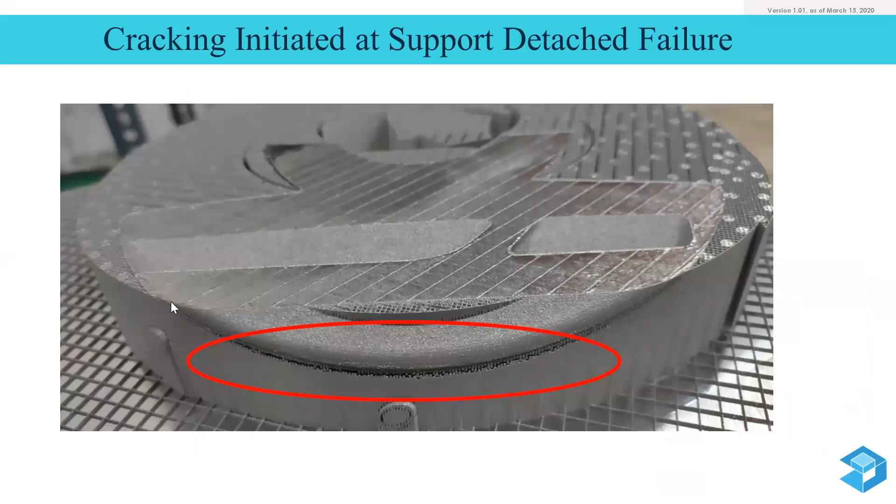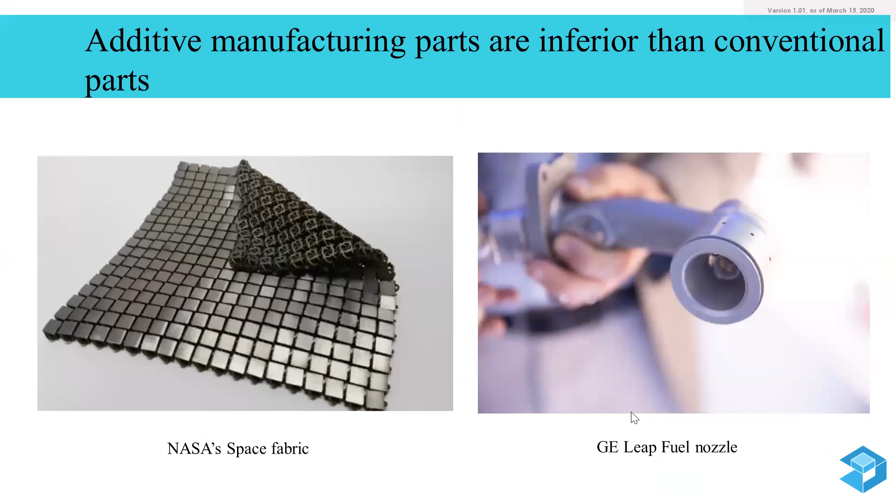Ms. Sonali is asking, do you have to make separate machines for each different application? No, generally the machines are for varied applications, but people are still modifying machines for certain applications. For example, there is a company in New York called Launcher. They get their machine manufactured in the US for their height requirements, because they make the complete body of a rocket launcher, so they require something around 1.5 meters. So for different applications, the machine manufacturer works differently and provides certain add-ons.